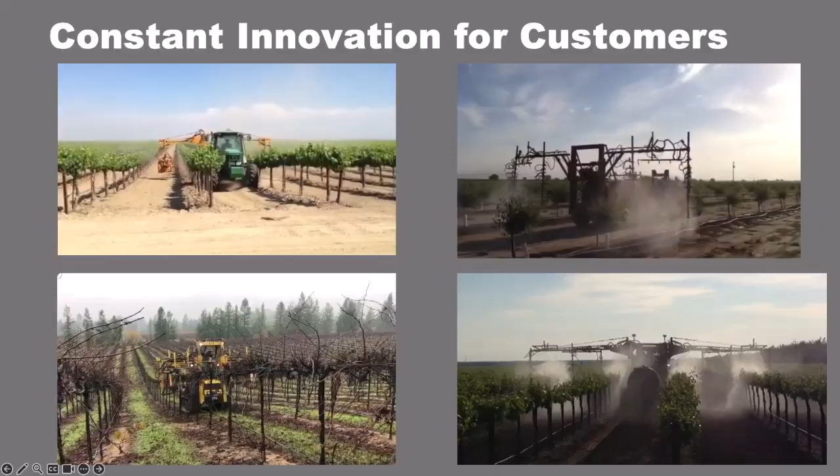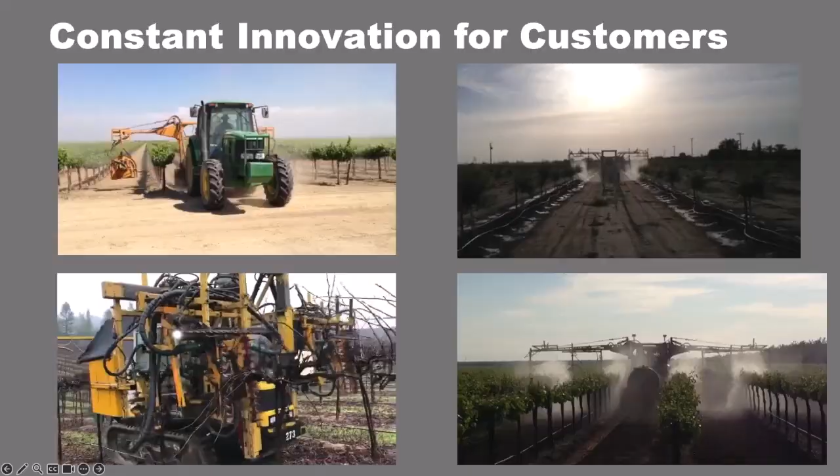Self-capitalized, right? Making the innovations to do 3-row spraying, trying to do vision guidance to trim cordon on vines, back before the technology even really existed to do some of this. And then they said, you know what, we're having such a hard time finding enough tractor drivers to do this business.

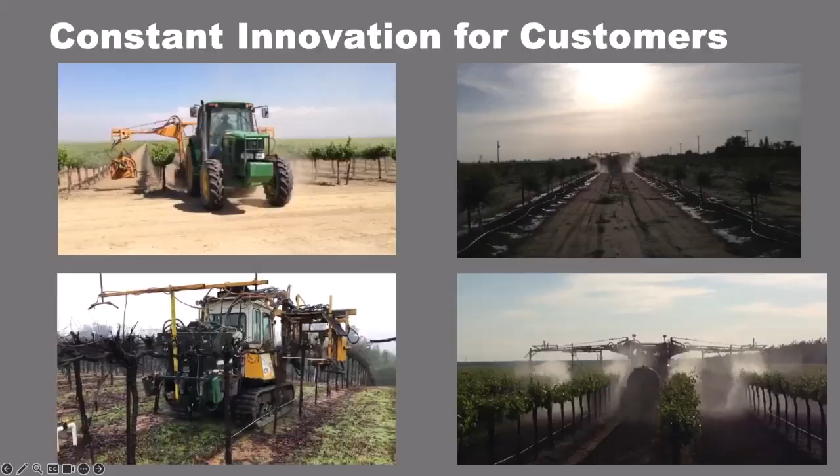We're going to have to innovate and find a way to do it differently than what we do today, or we're going to have to get out of this business entirely. And they decided, at dinner, we're going to go draw this thing out and see what it can look like. Because these are the types of problems that exist, right? You get an irrigation line that splits and becomes mud, tractor gets stuck. They bring out a truck to try to pull it out, splits the tractor in half. I mean, it's just a mess, right?

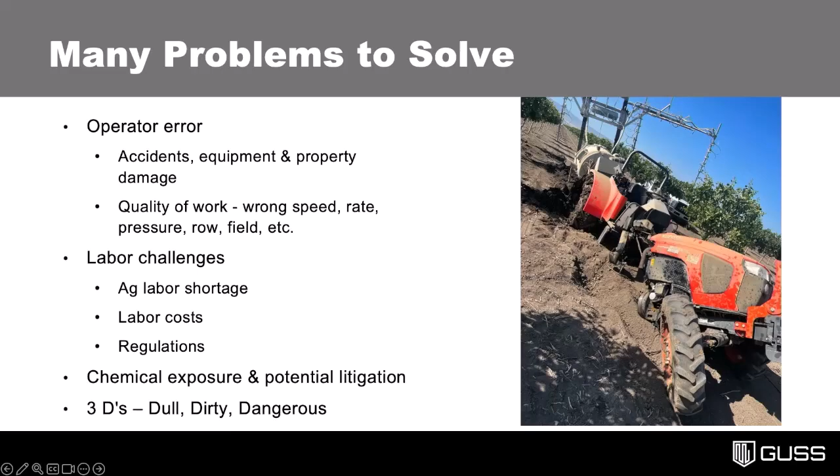Human error is real, right? Whether you grab a different gear, you go the wrong speed, you spray the wrong rate, you put the wrong material on, you don't stop spraying when you get near a house or something like that, right? There's all kinds of things that can happen. And they said, we have got to find a way to take human error out of this equation.

So out of that, GUSS was born. Back in 2014, this design, they went out and drew the design on the shop floor, right? Drew the design on the shop floor and said, this is what it's going to look like.

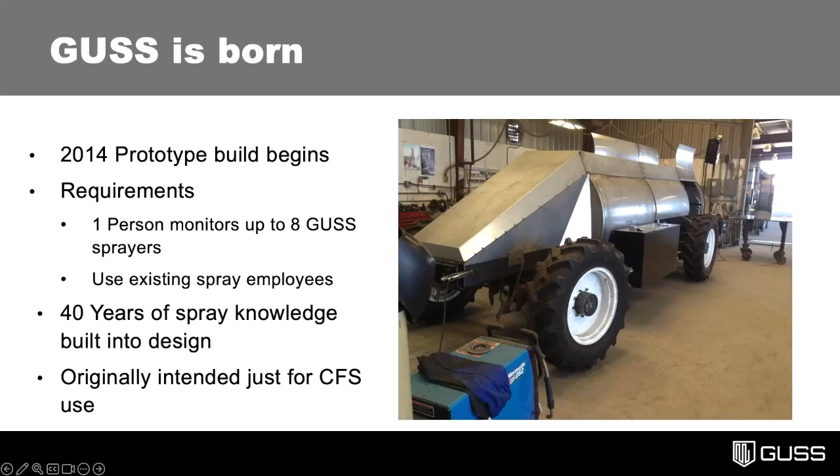But stainless steel for a reason, right? You're going super slow. It needs to be able to withstand a lot of heavy-duty branches and whatnot coming after it, just trying to tear apart the machine. It's got to be resistant to corrosion, et cetera. It's got to be able to lift the branches up and over the machine. It's got to be very durable, it's got to be very safe. So that's what they designed right there, and the machines today in operation look very, very similar to that.

We have 3 machine forms. You have a big one that's meant for the tree nut business, so the pistachios, the almonds, the stone fruit, even some citrus in California that are spraying with the Orchard GUSS. You have the Mini GUSS, which is just a shrunk down version of the big one, about 70% of the footprint, meant more for the vineyard application, smaller row spacing, tighter row spacing, with some majority of citrus would be in this. They're both powered by John Deere engines now, so 173 horsepower.

And when you think about the air blast spraying, what do you have to do? You have to displace air, get the chemical into that space, coat the leaves, create the turbulence, coat both sides of the leaves so that you get the efficacy and you can control the disease or the infection that you're trying to fight. So you got to have 100 horsepower just to turn the fan and move that air, right? And you got to get that air and that material up 12 meters sometimes. So you got to have a lot of power. And then you also need to move the machine. It's 4-wheel drive, it's 4-wheel steer, et cetera. So a lot of horsepower.

Mini GUSS and Orchard GUSS have both the same. Herbicide GUSS, we took a look at it and said, hey, we do 8 to 10 passes a year with material application in almonds, a little fewer in pistachios and pecans. But you have this herbicide application that you need to do. And if you can spot spray the weeds and control that with the herbicide, you can save upwards of 80% of the chemical. You can have a 600-gallon tank spraying the herbicide, you set it in the field, you lay a route in, you tell it to go do the job, and away it goes.

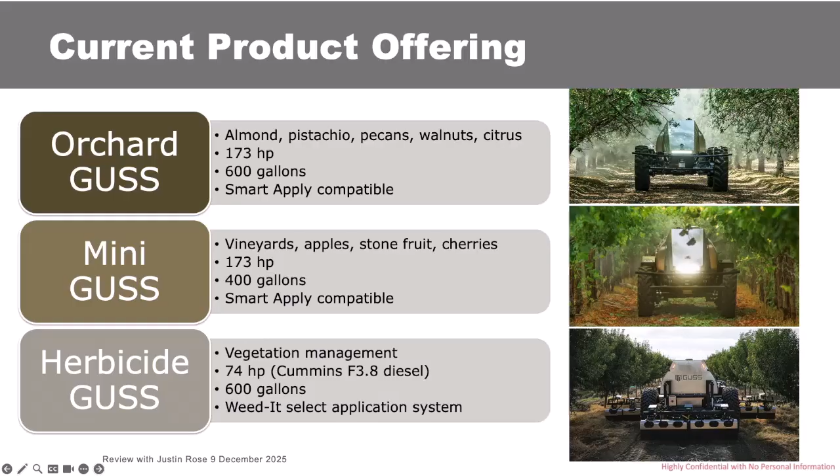We have a significant number out, and I'll share this in a minute, of the machines that are out in field today. Value proposition, when I always try to look at it from, if I'm a grower and I have pecan in this area, whether it's pecans or peaches or whatnot, what's really the battle that I'm fighting? Is it the labor aspect? Is it the needing the precision aspect of the application? Is it safety, efficiency? Where's my return on that investment, et cetera, right?

So the beauty of GUSS is it does the exact same way every single time, without a doubt, right? I'm not going to grab a different gear, not going to go faster, I'm not going to spray less, I'm not going to spray the wrong thing. It is going to do exactly what I tell it to do every single time. It is not going to get COVID, it's not going to call in sick, it's not going to call his girlfriend at night, not going to take a 40-minute smoke break, all of that stuff, right? GUSS will work when you want it to work, the way that you want it to work, up to 24 hours a day.

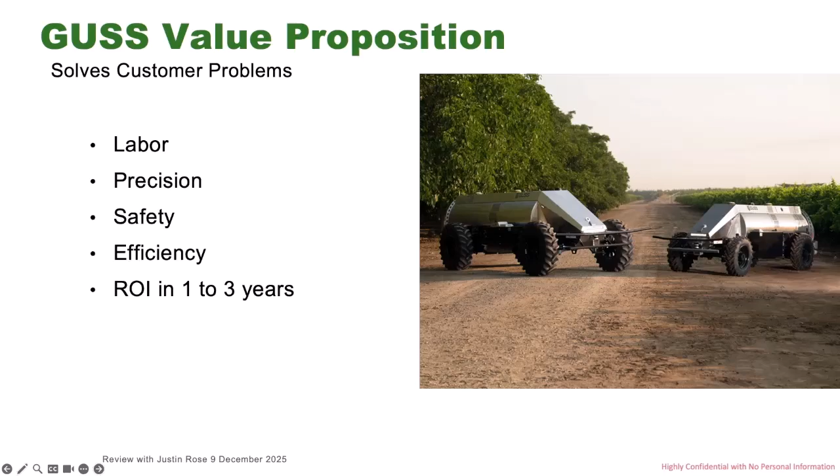So the question is, how much can you spray with it? You could spray 50 acres in a 10-hour shift, but if you wanted to, you could keep going for another 10 hours, right? Because as long as you have somebody supervising the machine, it sprays fully autonomously, does that work, and you have one person out there looking after the machine. You have one person making sure that it's filled.

So when you look at the scale of what GUSS can do, on the left-hand side, traditional spray system out in California, you got 12 tractors, 12 air blast sprayers. You have a lot of people that are involved in this operation, right? 12 tractor drivers, a couple people filling the machines, you got a spray supervisor, et cetera. If you look at what GUSS can do, I can do that with 8. Right? So I take that down by a third with the machines. I reduce the people significantly.

And it's not really like taking people off the farm and out of jobs, it's repositioning them to better jobs. And when you look at what typically happens is that I'll have a gal that's running the machines, supervising the machines. They'll get a boost in pay of upward of $4 to $5 an hour because now I'm doing a different job. I'm not just driving the tractor, I'm supervising the equipment and the machines. You have 2 truck drivers that are filling the machines, keeping them running.

And the visual I'll give you is that when I first went out there, saw the machines, it's pretty impressive. It's a machine that's 20 plus feet long, taller than I am, going down these rows, doing it at night, and I'm sitting there waiting, and all of a sudden I hear this thing, I hear the noise of the engine, I hear the fan blasting the spray. All of a sudden it comes out, makes a turn all by itself, stops.

30 seconds more, another one comes out and stops. 30 seconds more, and another one comes out and stops. And then the truck comes up, 3 minutes to fill it, 3 minutes to fill it, 3 minutes to fill it. So when you think about productivity and efficiency, all of a sudden I have 95% of my shift is spent productively spraying. 45 minutes on, 3 minutes off.

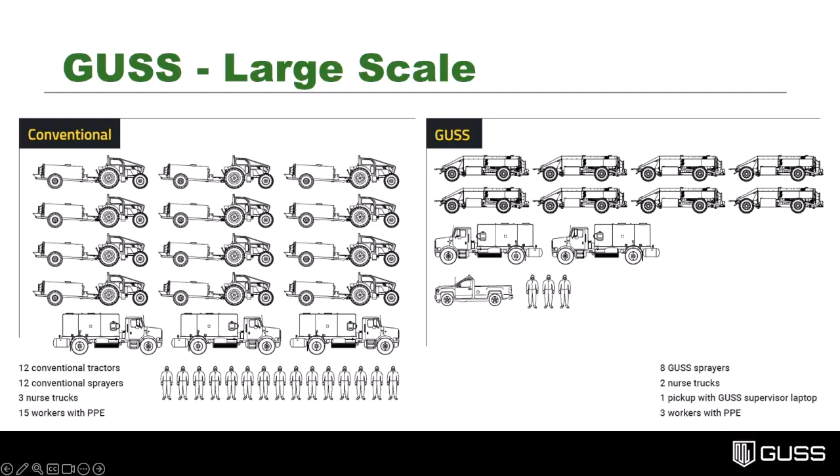45 minutes on, 3 minutes off. So you think about that versus the human way of doing it, where I spray for 45 minutes, have to drive to a wellhead, spend time on breaks, et cetera, taking another 45 minutes off. 50% goes up to about 95% efficient if you're really managing it.

So then you can look at this from the application step itself. We're all concerned about environmental sustainability. If we can reduce the water needs, if we can reduce the material that we're needing to spray, that's one of my largest operational line items, right? So if I can reduce that by a third, if I can look at repositioning the labor force, if I can reduce that out, even better.

And documentation, right? Precision agriculture through John Deere Operations Center. You can see your field, you can see what you've done, you can see what you've sprayed, you can see when you sprayed. So you have all of that documented.

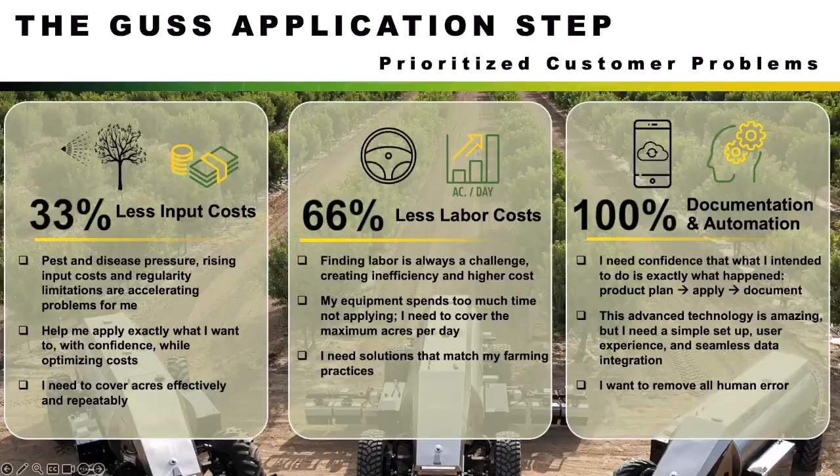When you look at real autonomy, doing the job the way you want to do it every single time, it's a real solution, commercially available today. You have 260 plus machines out there, mainly in the West Coast, Pacific Northwest, some in Florida and some here in Georgia spraying pecans. We have them in Hawaii, Australia, Spain and Brazil. So John Deere is working to scale this business, meeting the growers' needs throughout the industry.

2.8 million acres have been sprayed by GUSS, getting close to the 3 million acre mark. Again, it's very, very real, over 600,000 hours of runtime with these machines.

I think one of the things they may have done is built them too good, because we have machines out there at 12 to 13,000 hours and they look brand new. They don't eat parts, they just work and spray. It's fantastic to watch them do the job they're designed to do. It's the epitome of an American success story, and it's a proud part of the John Deere family now.

As we look to bring more of these machines to the southeast, if you know growers with peaches or pecans, we think those are the two best opportunities right now, we can definitely talk. Feel free to reach out. GUSS has a great website, gussag.com. Check them out and contact us, we're all about doing demonstrations and showcasing what the machine can do. So I think I'm good.

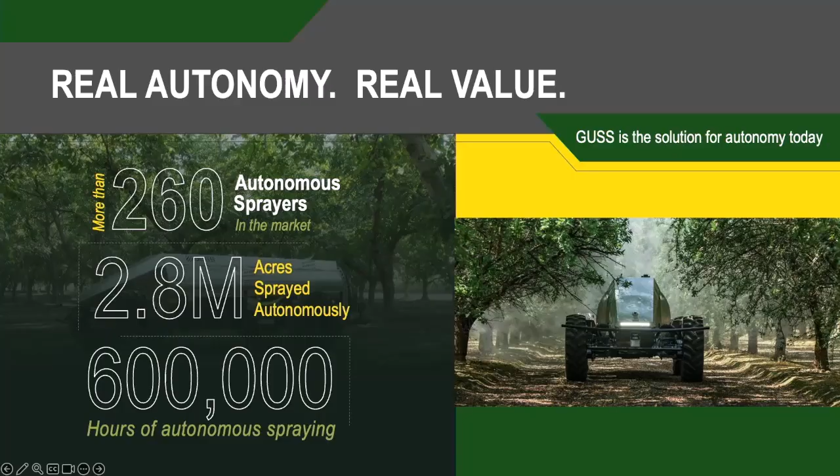His presentation is titled Finefield: From Manual to Machine, Realizing the Benefits of Blueberries Harvest Innovation. Finefield is an ag tech company focused on autonomy, fresh market blueberry harvesting with quality equal to hand picking. They're fully electric, solar powered harvesting machines that gently detach berries, transport them hygienically, and minimize ground loss. Requiring just one operator, they harvest an average of 1,500 pounds an hour, reducing labor while preserving fruit quality and sustainability. Thank you, Marcel, he traveled a long way to be here.

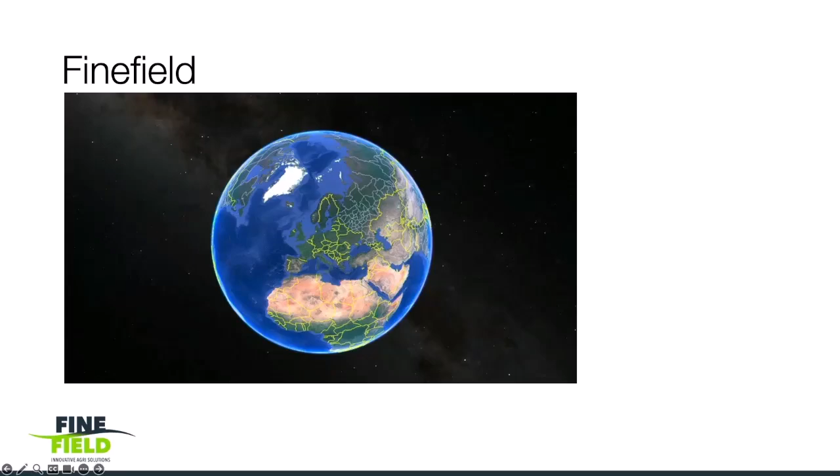Finefield is a company located in the southeast of the Netherlands, in Europe. The Netherlands is a hotspot for blueberries, and also a hotspot for technology, which made it a great place for creating such a development. We were founded back in 2018, and one of the founders, actually the initiator, was a blueberry grower.

They had the need to improve their productivity. The cost of labor was rising, margins were shrinking, so they had to find a solution. We took on this challenge, and we fully focused on blueberries. I think that's important to mention.

When we took this challenge, we looked at the market. What we saw is that over the last 10 years, the market doubled. So the demand in blueberries doubled. And looking to the future, the expectation is that the market will again double in the next 5 to 10 years. So that puts enormous pressure on labor.

Harvesting blueberries is very labor intensive, and at the same time there is an increasing shortage in labor supply. We have an aging workforce - that's not only in the US, that's in Europe, that's even in Africa. So we have to find a solution for labor-intensive work.

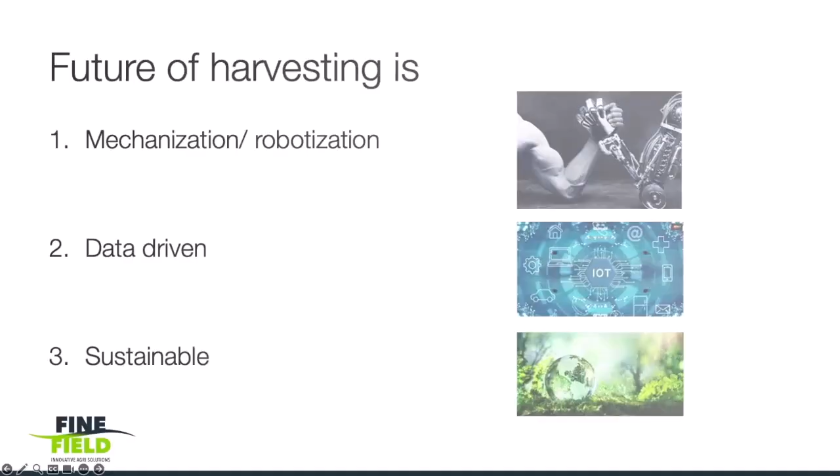We called it the Harvy 500, a robotic harvester, and it has some unique characteristics, I think. It delivers fresh market quality berries. It minimizes waste,

up to 3 to 7%. It replaces up to 100 pickers. It's electrically powered, already mentioned, solar charged, and internet connected.

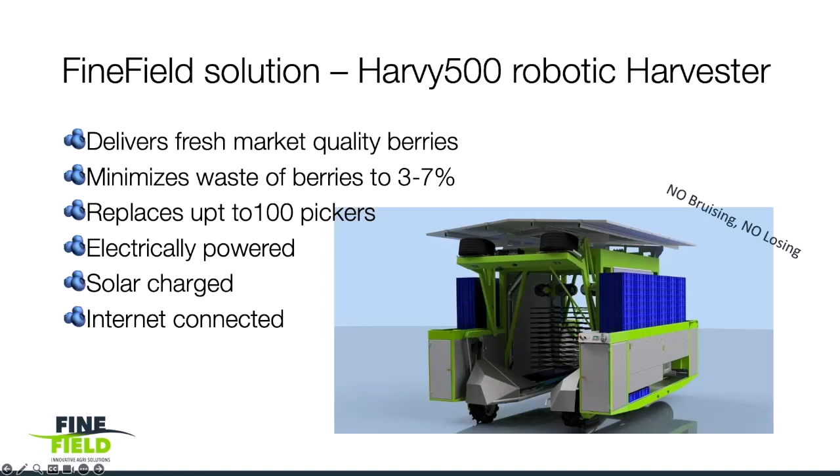Let's deep dive a little bit into these characteristics. So, fresh market quality - what's important is catching the berry. For that, we developed a new catching system based upon brushes and so-called catch sheets. It's patented. Next to that, we developed a new shaker head.

Because of the electricity and electronic components, we are able to control the frequency of shaking very well, which enables us to adapt to the specific circumstances of blueberries, different varieties I would say.

And what's important when harvesting is reducing the drops. So we have only 2 drops in the machine - 2 moments that can affect the quality of the berry.

For reducing the drop, or dampening the fall, we used a principle - this explains a little bit the principle that we used. On the left-hand side, you see berries drop on a hard surface. They bump a lot, meaning all the kinetic energy is absorbed in the berry, which ends up in bruising.

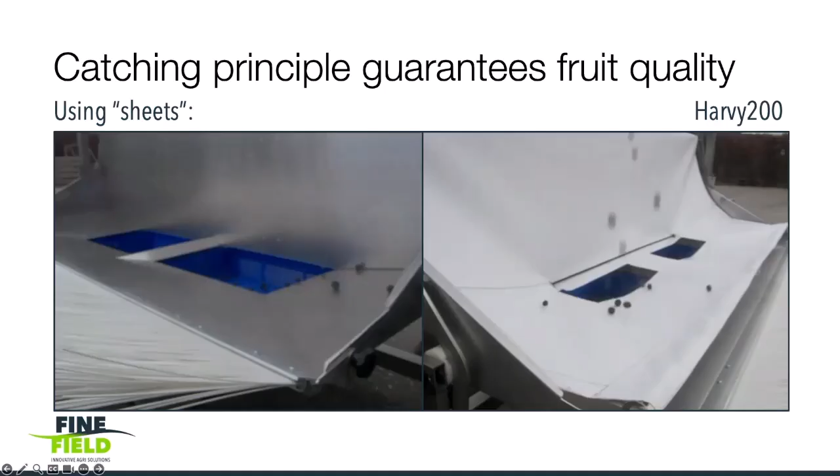On the right-hand side, you see the use of a catch sheet - there's a sheet with air underneath. Berries are dropping basically dead, meaning all the energy is absorbed by the sheet, and it eventually ends up in less bruising.

For proving this, obviously customers give us feedback, but it's better to have independent research. Washington State University did some research, measurements on harvesters with catcher plates, our machine, and hand-harvested fruit. They reported some interesting points. First, fruit harvested by catcher plate machines showed twice the internal bruising damage levels compared to

the Harvy 500 and compared to hand pick. Then comparing the Harvy 500 with handpick alone, there was no difference in internal bruising or firmness throughout the cold storage period - that was for the variety Calypso. Looking at top shelf, handpick was still better, so varieties play an important role when you plan for mechanical harvest in the future.

The last point is on some traditional varieties like Blue Ribbon and Duke - there too you can see that the catching system we developed is significantly better than using catcher plates.

This is a survey, or quality measurements, done by the biggest retailer in the Netherlands. They ran a series of tests comparing hand-picked fruit against machine-picked fruit, looking specifically at firmness and the percentage of softs. For both characteristics, over the series of tests, the machine performed better than hand-picked, which I think is pretty remarkable.

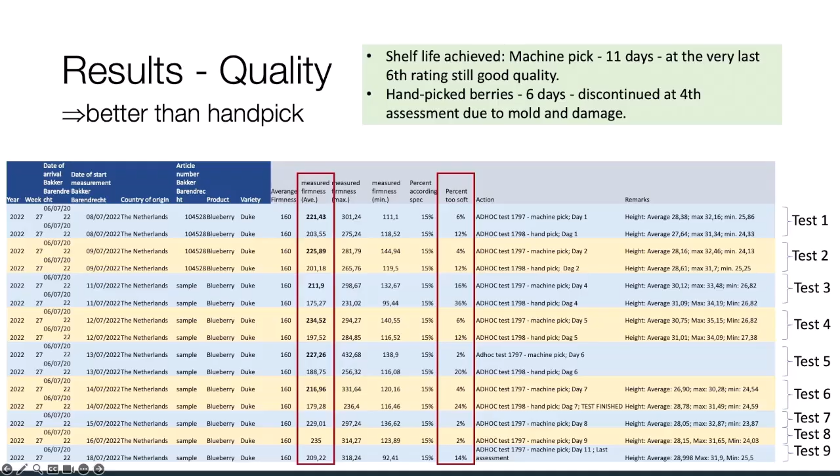In the end, good results. So that was the no-bruising part of our developments. Then the second point that we definitely looked into was the minimal loss of product.

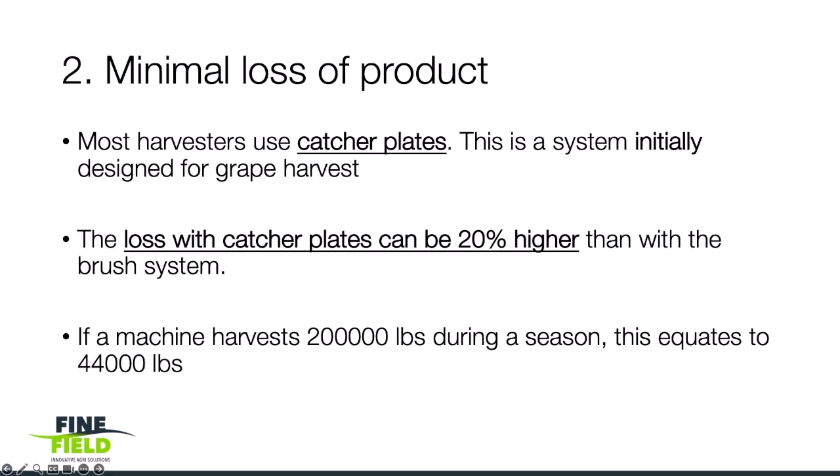No bruising, no losing - the first two points. Then the third point is the fully electrical, solar-charged machine.

We chose electric because it's environmentally friendly, but an electric motor is also very efficient. We only use 4 kilowatts to harvest about 2,000 pounds an hour, whereas a typical combustion engine machine uses about 60 kilowatts.

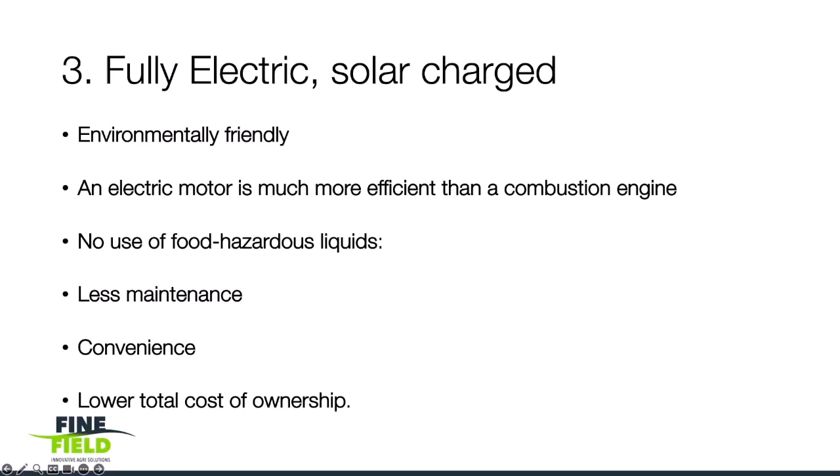The machine drives autonomously, which means it has mechanical sensors that sense the bush. Next to that, it has GPS, and by mixing this with software, it can determine the middle of the row, so it always drives exactly over the middle.

It fills the crates automatically to the set weight. There's a blower for cleaning the berries from leaves and twigs. It stacks the crates and puts them in a buffer on the side of the machine. The machine can drive both ways and has only one operator, who basically only needs to control speed, aggressiveness of shaking, height of the machine, and aggressiveness of the blower.

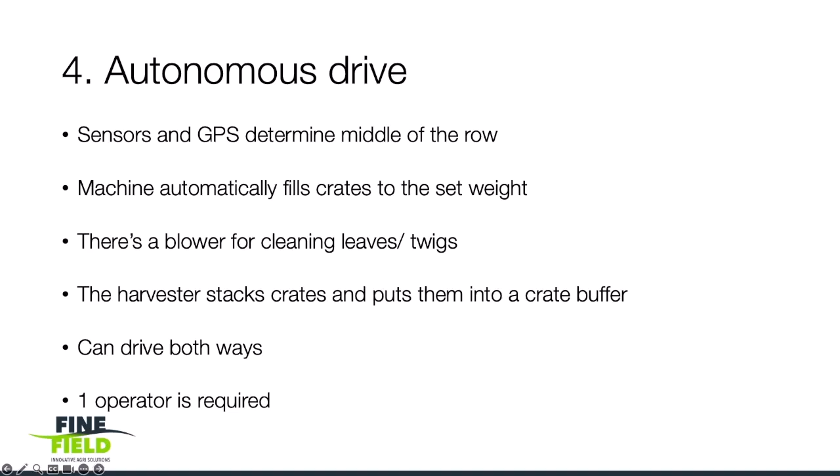It's internet connected, which enables us to service the machine remotely. We can update software remotely, but more importantly, we have 400 parameters that we can read from a distance. So if the operator has a problem with the machine, we can immediately see what's going on, and if the operator calls us, 9 out of 10 times we can help him on the spot. This is very important because downtime should be kept to a minimum, especially in harvesting season.

It also gives us the possibility to do predictive maintenance. When a certain component fails after a certain amount of running hours, you can inform other growers that it can happen and advise them to replace these parts before the season.

We have a customer portal. This portal provides harvesting information on yields and settings of the machine, but we also have a heat map of fields, so you can see which part of the field has higher yield than other parts. This can give you clues for investigating improvements for next year. Next to that, we have potential for many more added-value services based upon using data. Data is definitely something that we will use in farming for the coming years.

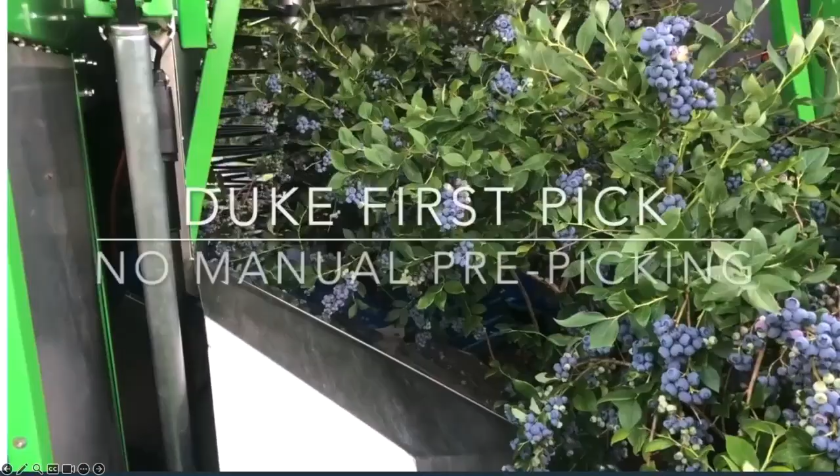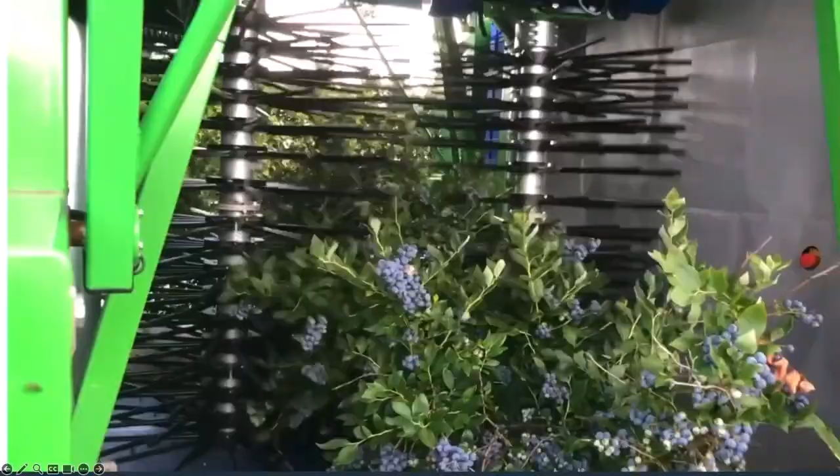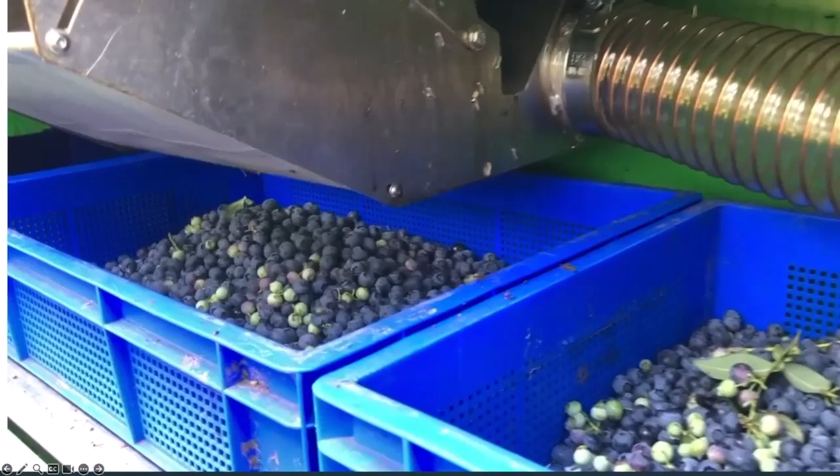Here you have the first drop moment in the machine. The conveyor belt is where it drops onto. This is the second drop moment — it drops onto a sheet again, lower, and rolls into the tray.

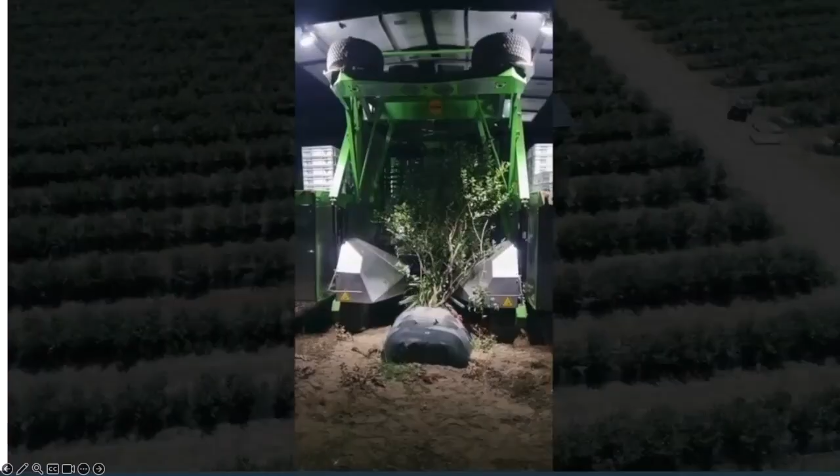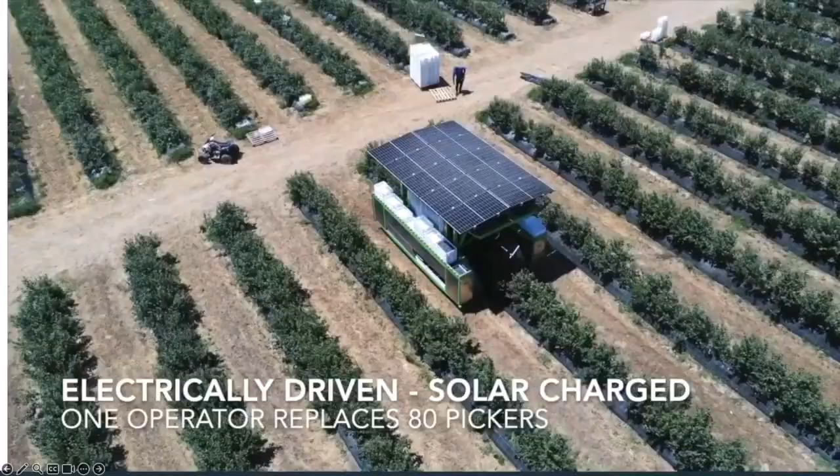Customers work at night, especially when they're in very warm areas. You can run the machine all day on solar, so you don't have to plug it in, you can just leave it in the field.

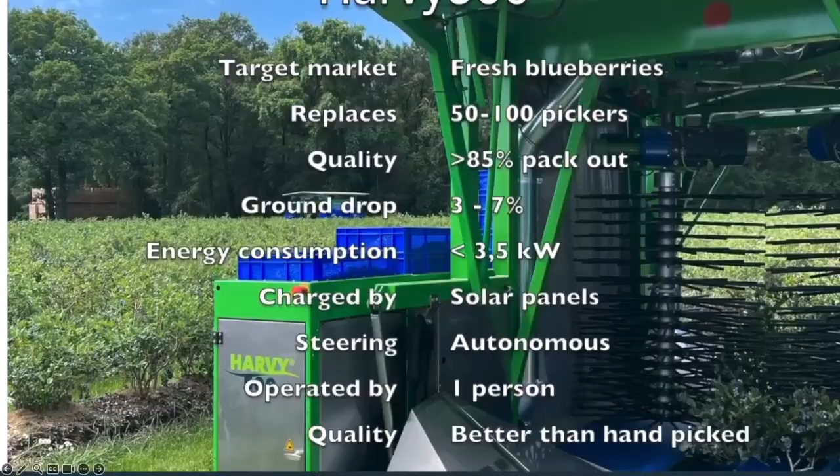How many people typically does it take to harvest 1 acre in a day in blueberries? Typically, and I'm European so I calculate in 2.5 acres... let me put it otherwise. Harvesting in 1 hour, a picker does typically about 25 pounds on average, so the machine does, let's say, 1,500 pounds on average. That's the difference, and obviously that depends on running conditions, variety, circumstances, and whether pickers are experienced or not. But in the end, you on average replace between 50 and 100 pickers.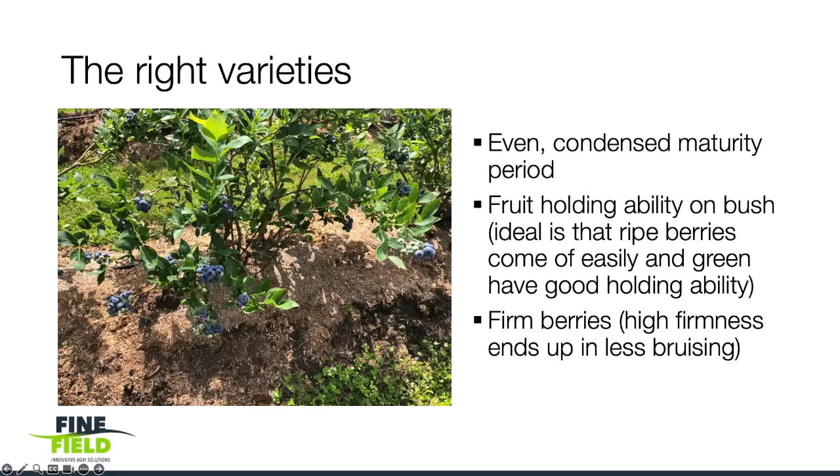As an outsider, when I eat blueberries there's different ripenesses, and I wonder, does the timing of harvest or the parameters of how you shake the plant influence the ripeness level and uniformity of ripeness? Overall, when a berry is ripe it comes off easily, so that's the moment you have to pick. If you use a machine, typically you wait longer before going in. If you pick by hand, you go early to try to get everything off that's ripe. But using a machine, you wait a little longer and accept a bit more softs, because if you keep the berries longer on the bush they get soft. But afterwards the berries get sorted.

Thank you, Marcel. I have a question — here in Georgia we have two different types of berries, the Southern High Bush and the Rabbit Eye. I know you have one or more machines here, and I know one of the growers that owns one of your machines, Sam Baker. Yep, we have several machines in Georgia. And overall they perform very well. It seems that mid-chill varieties perform very well on the machine. Pine Bloom Farm, Sam Gray, mentioned they have a variety, I think Georgia Dawn, that's pretty difficult to pick — a soft variety — and they had circumstances where they could use the machine but couldn't use people to pick that variety. That shows a little on how gentle the machine is on the berry.

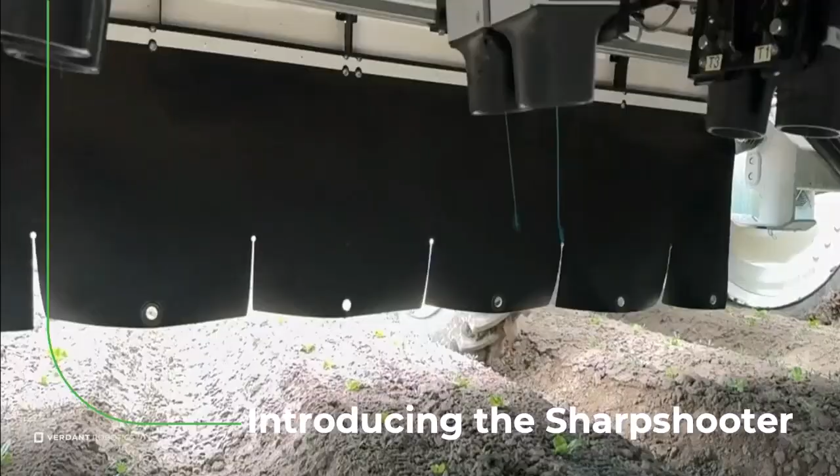This is a 20-foot machine, originally made for 6 40-inch rows, but the boxes are on rails so you could slide around for different spacing, whether you're 68 or 72 or 80, 88, it can handle it all. You could also raise it to 34 inches above the crop for full swath of coverage. There's a little bit of flexibility on the size of the machine, so we can go a little in from 20 feet or a little over, say a 24-foot system, but that might require populating 2 more boxes into the machine.

So it's up to 99% less material out on the field - 68 to 99% less material depending upon what molecules you want to put out and the weed density out there. Typical application for a broadcast sprayer would be, say, 20, 30 gallons per acre. We're typically applying from 0.9 to 1.5 gallons per acre of material on the ground.

We found in our experience about only 4% of your fields are covered in weeds. My opinion has changed on that now that I've been in Florida. Florida's weed pressure is insane. Like our worst fields in California, Arizona, or the Pacific Northwest, that's like an everyday occurrence out here. The different climate and how wet it is out here, it has continuous flushes.

I think I'm starting to need glasses. It's hard for me to read anymore.

We priced the machine to have about an 18-month ROI for typical growers. It really depends upon your crop mix, your crop economics, and whether you have conventional only or some conventional organics. We have some organic customers getting payback on the machine in a handful of months, and then we have other growers doing, say, grass seed, to where they're pushing more towards 18 and 24 months. So it really depends on your cost structure and your commodities and what you're doing.

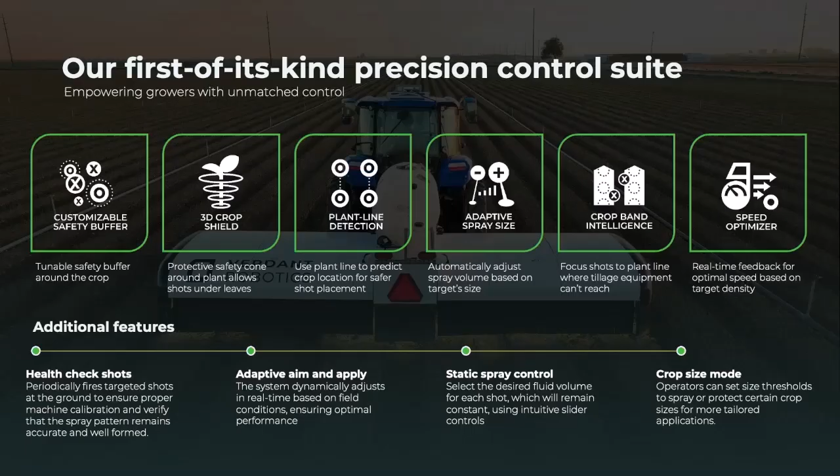Talked about these 30 different crops, so we could weed, we can thin, and we can apply to the crop. If you have some other technology that already thins, we could weed and get rid of doubles if that technology missed them.

We've currently thinned a bunch of different types of lettuces, broccoli, cauliflower, as well as cantaloupes. Another big thing to note, we do plasticulture, so we do watermelons down in Southern California, and the grower has a really big nutsedge problem, so he's using Sandea and having really good results with that.

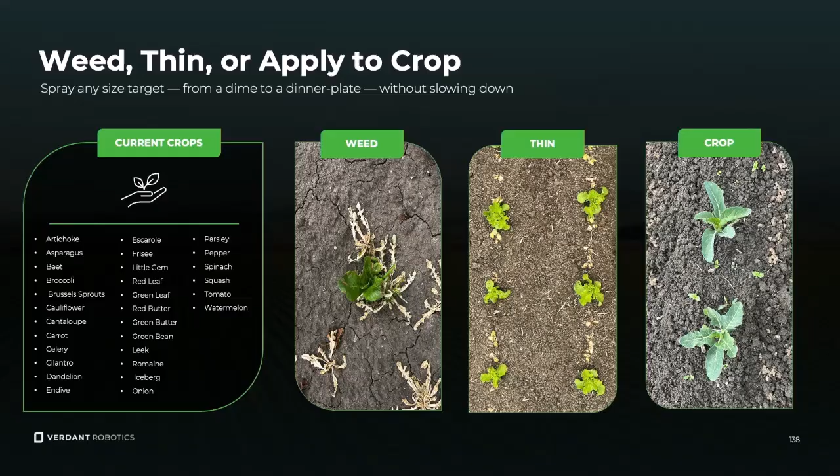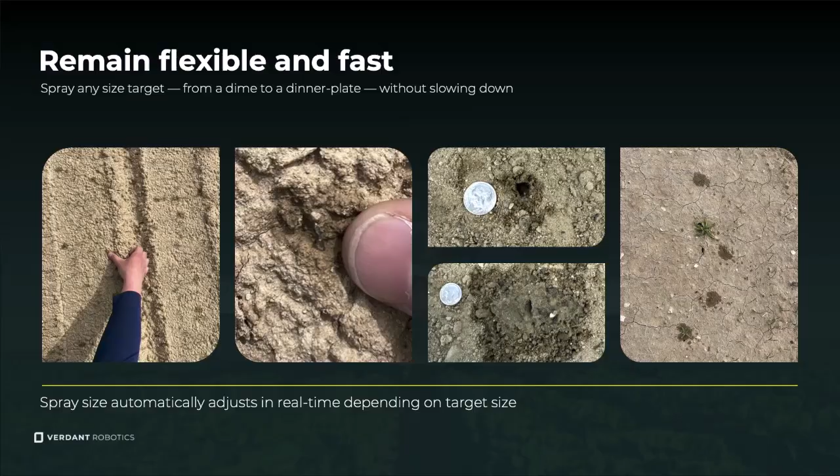Here you can see the smallest weed we can see, about 2 millimeters by 2 millimeters, right there by the thumb. The middle picture shows the shot, about the size of a dime, which is the smallest shot we can make. Each turret can make about a 3-inch by 3-inch shot as its max size, and they can work in tandem to get bigger weeds.

Shooting next to crop, under crop, is a pretty big deal for broccoli, especially in areas with high wind where you get J-hook and other issues. It's been pretty good for us.

One of the things is all the technologies have their right operating windows and conditions. A lot of mechanical solutions can't get within 1 inch of the crop, and even some spraying solutions can't get that close. From our data, roughly 1/3 of the weeds present in the field will have their foliage touching or overlapping the commercial commodity, within that 1-inch window. Those are the weeds we're really good at getting, and that's really where we save growers money.

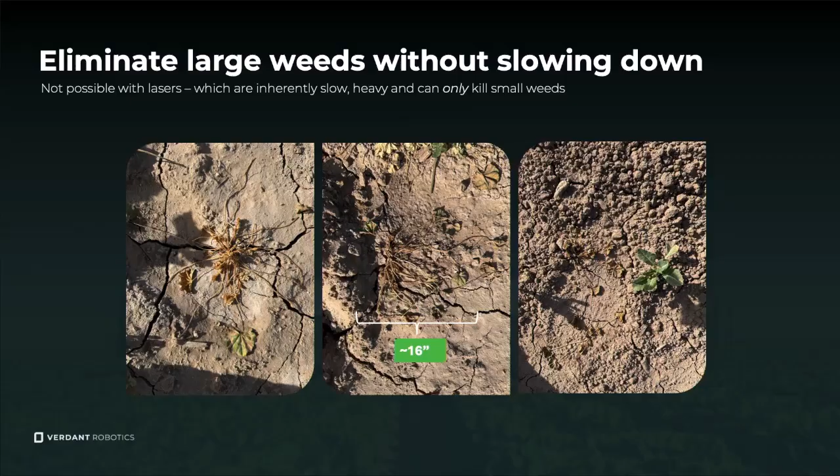This was actually organic, so the organic material we have labeled here in the States is really good. This was about a 16-inch Malva. We've done purslane about that large too with that organic material, and it worked extremely well. So Suppress and Home Plate have really been a godsend for us in organics.

The speed of the machine is 5 acres per hour, and that's going to double this year, up to about 10 acres per hour. Growers go day and night, getting anywhere from 35 to 60 acres per shift.

We've been able to neutralize weeds with fertilizer alone. This works in very hot areas like the Central Valley, sometimes out in Salinas, and definitely works in Yuma. I'd be curious to see how it performs here given the relative moisture and humidity in the ground. Not sure it'd work extremely well here, but there's probably ways we can adjust the materials to make it efficacious.

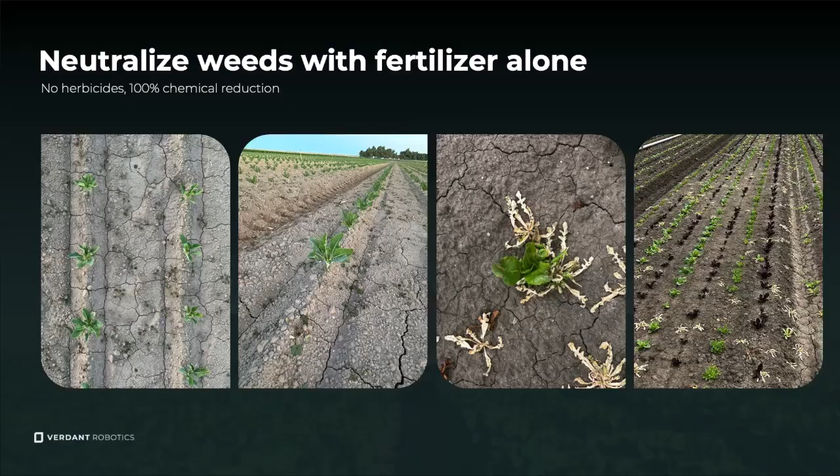You can see the picture on the right. We could have multiple leaf types, different colors, different commodities, all planted on the same bed, and we can recognize them all and avoid them without hurting them. We don't really care what's on top of the bed. The machine also doesn't care about your germination, your stand, or how regular the lines are - it's agnostic to all that. It does detect the crops and the weeds individually.

So we'll play a couple more videos.

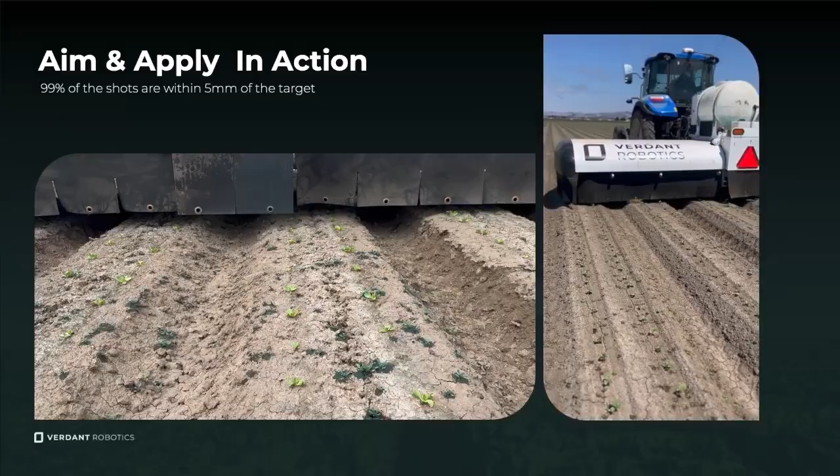So here's the fun one, here's what I was trying to get to. This is slow-mo video, so you could actually see it spray and then kind of spiral out, and you'll see it wiggle around.

The flashing, the cameras and the flash on the machine is all synchronized and regular. This was taken with an iPhone with a rolling shutter camera, so the lights and the iPhone were not synchronized, and you're going to see it. The lights help us make machine learning a little bit easier, but also to go day and night.

Yeah, and feel free to ask any questions at any time. It's much funner for me if we can have an interactive conversation versus me just talking.

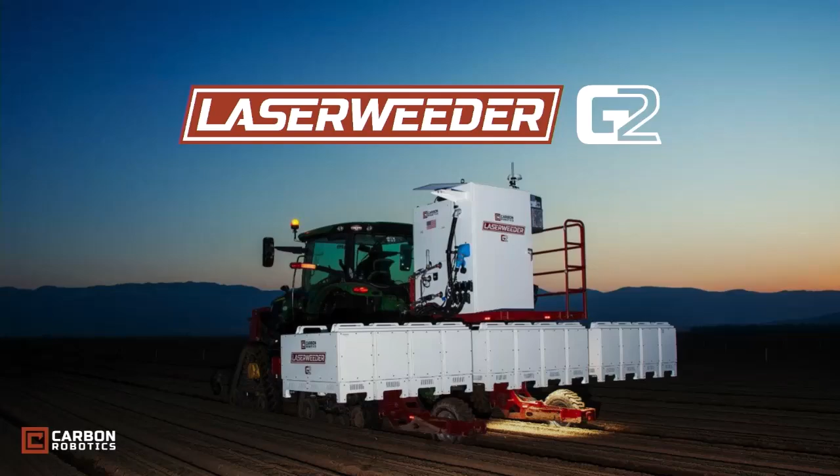This is our new G2 laser weeder, a 12-module unit, a 20-foot system similar to our Generation 1 machine. The biggest differences are that this machine is about 25% lighter, weighing around 7,200 pounds, and it's about twice as fast. We're seeing on average anywhere from 1.5 to 3 acres an hour.

We do have a lighting system strobing 4 times brighter than the sun, so most of our customers are running anywhere from 20 to 24 hours a day, 6 to 7 days a week.

Challenges with weed control - there are a lot of options out there: hand labor, herbicides, and mechanical. But we really wanted to come up with a solution with no soil disruption, no hand labor, and no chemical, and that's where the laser was born.

It's extremely precise, sub-millimeter accuracy. We're not only shooting the weed, we're identifying the meristem and targeting that, essentially boiling the water inside the meristem and destroying the cell structure from within. If you walk behind the machine, you see the lasers hit the ground, you see smoke come up, but you can actually hear these weeds popping as well. So it does guarantee efficacy.

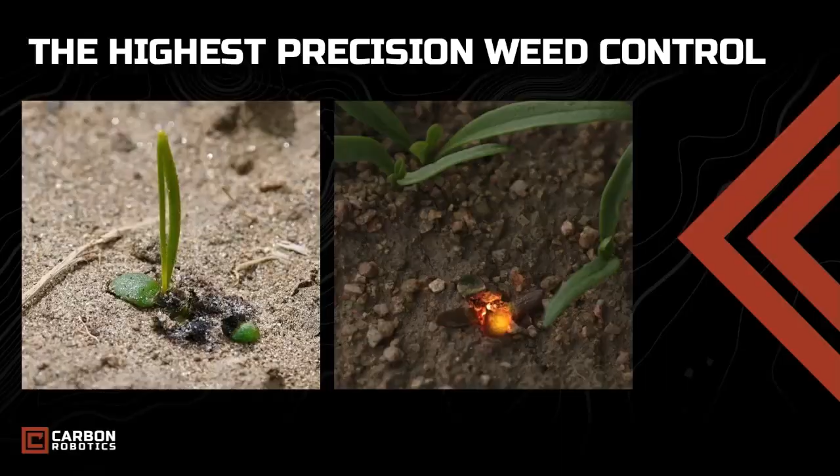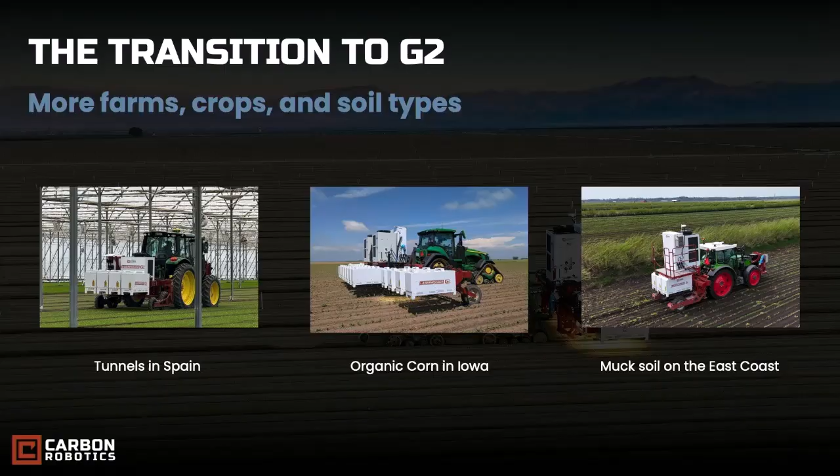Another exciting thing about our Generation 2 is that with these individual modules, we can accommodate multiple farm types. We're now in high tunnels in Spain, we have a 40-foot machine with 16 modules for organic corn and soy, and we're able to get into tough soil types like muck. Pretty much anywhere from 3 to 16 modules, depending on your wheel spacing, we can accommodate. We're in farms anywhere from 60 acres currently to 30,000.

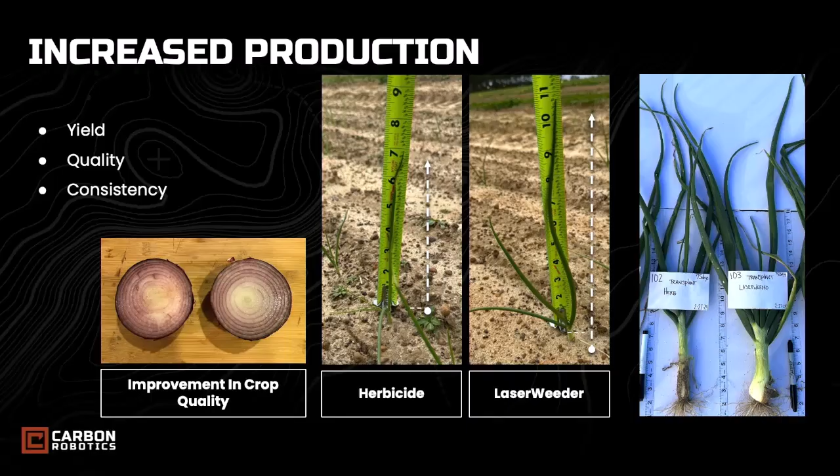Increased production is something we're extremely proud of. When we first started selling the laser weeder, there were a lot of theoreticals we talked about, but now we're working closely with universities doing third-party studies and finding really good information. We knew in onions that yield increase was an option, especially in conventional, but with these third-party studies, this red onion picture on the bottom left of your screen, we've learned that running a laser we're seeing about a 16% increase in single centers and about a 36% increase in firmness. So you're seeing the increase in yield in the field, but it's also benefiting you in your pack house.

Some other really cool things are, you know, we've had a lot of customers come to us and say, you're taking all these high definition captures of our field. Is there any way we can get any of that data back? And so because of that, we've introduced a couple new features.

We have a companion app, a mobile phone application where you can see in real time what's going on with your machine, what block it's in, how long it's been running today, what the average speed is. But you can also open up your computer, what we call the portal, and get real-time and historical data of every time that machine passed through that block. Stand count, average crop size, average crop density, even your weed sizes and weed densities broken up into multiple categories of weed types.

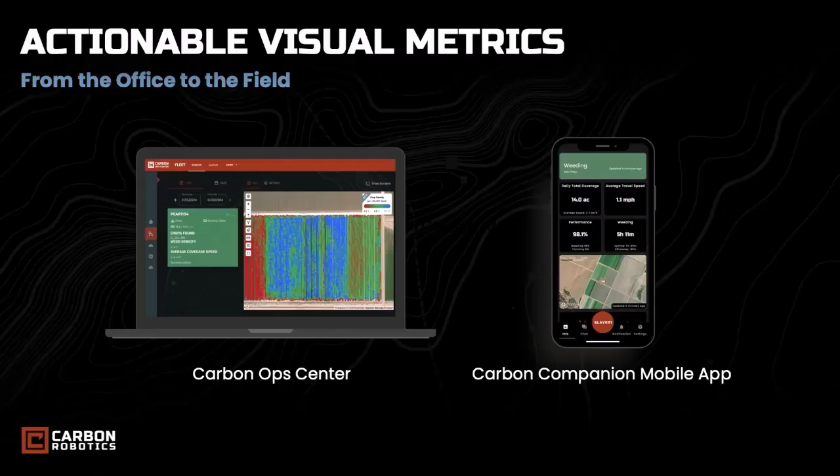I think this is really powerful information. We have customers pulling this up, and you can pull up a heat map of weeds and see the northwest corner of a block is bright red with broadleaf. So we have customers attacking very specific portions of their farm, or going and taking soil samples to really understand why that's a problematic section of that specific field.

Another thing I think is worth talking about, and it's something we're extremely proud of, is the tech support. I think in anything, you're only as strong as your weakest link, and service and support typically becomes a lot of people's weakest link. With Carbon, we actually offer 24/7 remote support because you can run this machine day and night.

A lot of people are putting H2A operators in the tractor. They're in that machine. It can be Saturday at 3 o'clock in the morning, and they can see that it maybe is missing some weeds. They can tap the chat button inside the tractor and, in Spanish, say, hey, I think I'm missing some weeds. Someone will sign into their machine remotely and respond back to them in Spanish or whatever language they speak.

I would say 90% of the issues get resolved remotely. But if we cannot resolve it remotely, we've got a very strong team across the country, and we'll get on site and solve the problem immediately.

The next thing I am going to talk about is our newest product: the Carbon Autonomous Tractor Kit. I think there's a very big race to autonomy right now, and there are a lot of autonomous options. We wanted to develop a kit that did not require you to buy a new piece of equipment, a very expensive tractor. So this is a bunch of components.

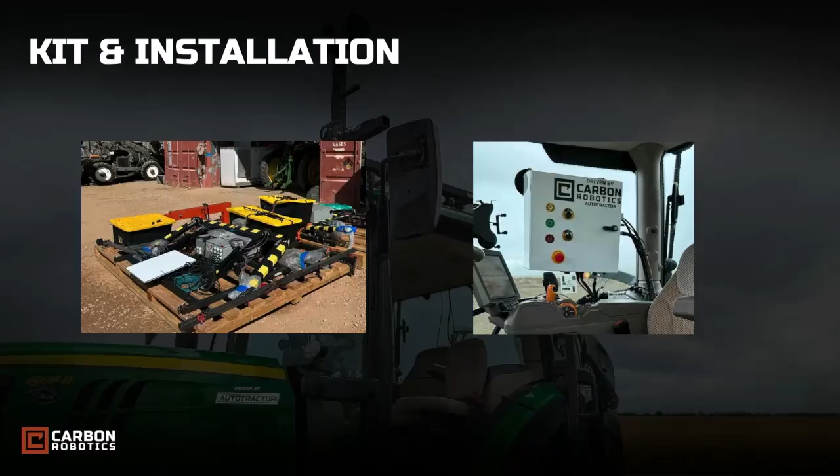Another really cool thing is, let's say you have a daytime operator and you say, I'm good 6 a.m. to 6 p.m. Carbon can come in and take over the night shift, running 6 p.m. to 6 a.m., and you're only paying that hourly rate, which is very comparable to what you're probably already paying your tractor operator. You're just not paying insurance, you're not paying overtime. We can come in and take over whatever hours you need us to run that machine for you.

Currently, we're doing laser weeding and ground prep. Harvesting and planting absolutely will come, but as you know, there's a lot more controls that need to be done inside the tractor for those things. So that's where we are right now. We're still in beta. We have quite a few machines out in the field running very successfully, and I think this fall we're actually going to hard launch this product.